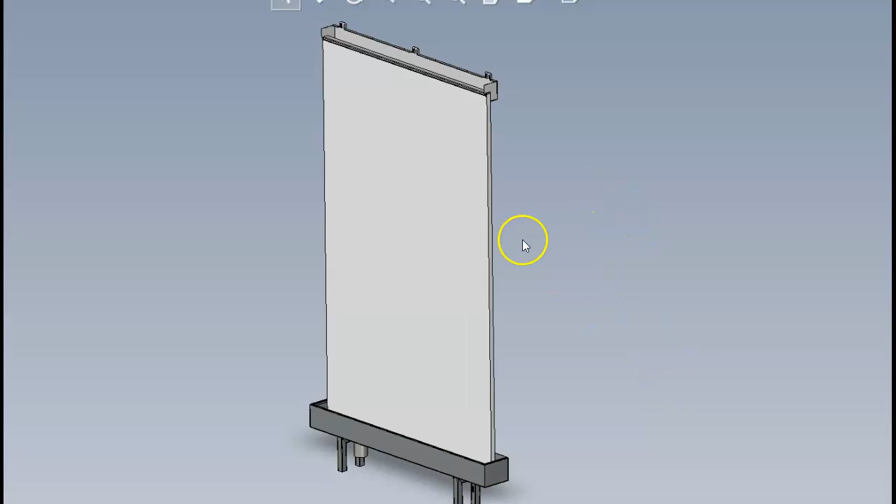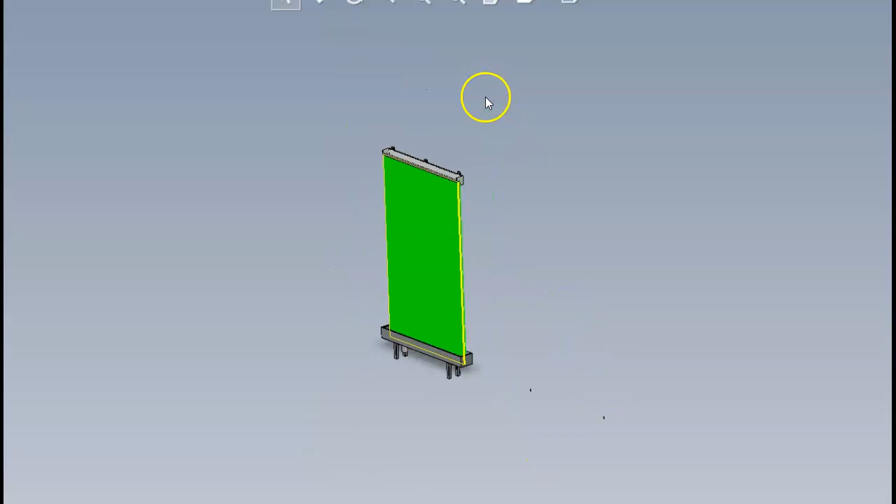But in this tutorial, I'm going to show you the basic setup of a stone water wall water feature. Actually, it's three main components you have to consider. First, it's the overflow channel here at the top, then the bottom tank, and then you have the stone plate. Usually, the stone plates are delivered with, let me check, 30 millimeters. This is what you will usually get when you order a stone plate. And then here I will show you the overflow channel.

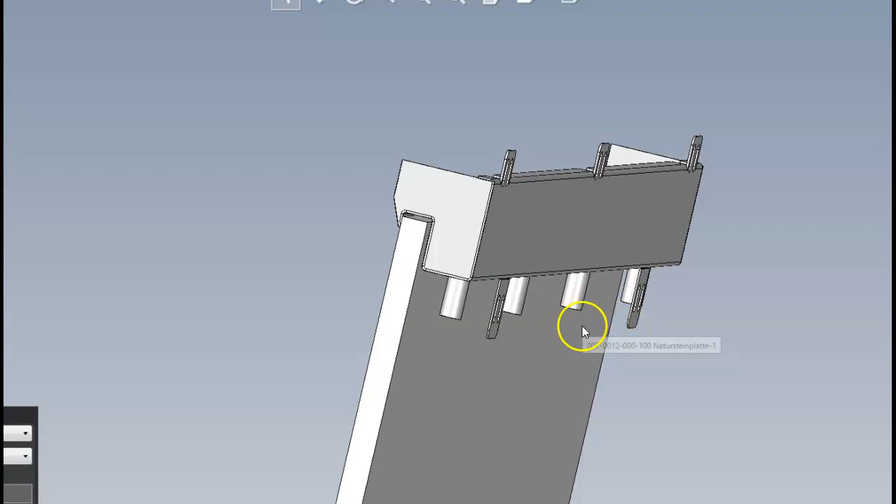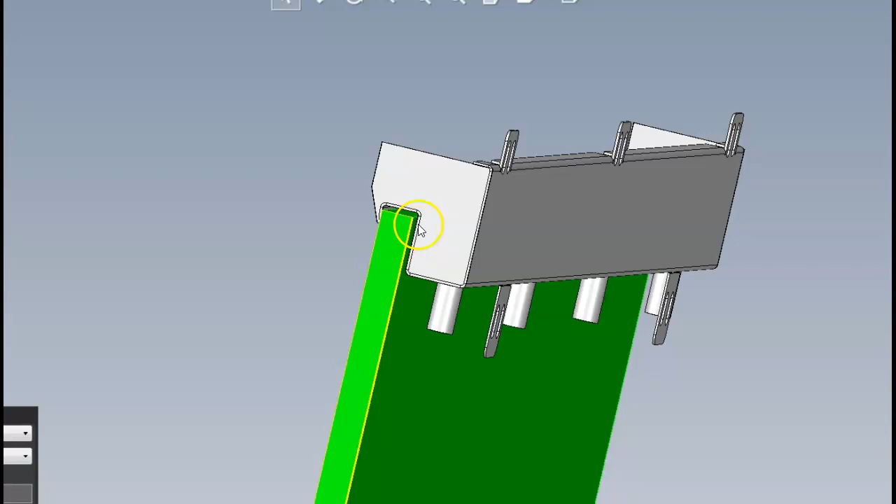So what we have here is the overflow channel. This is around about 6 centimeters in depth and 6 centimeters here in height. Then we have here a profile which is around about 35 millimeters, so that we could put in the 30 millimeter stone plate and we would still have 5 millimeter space in case of uneven bendings or whatever.

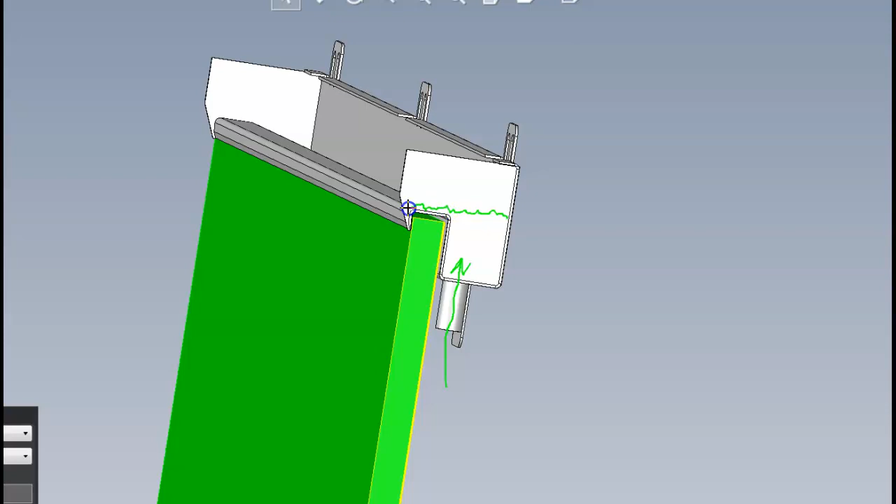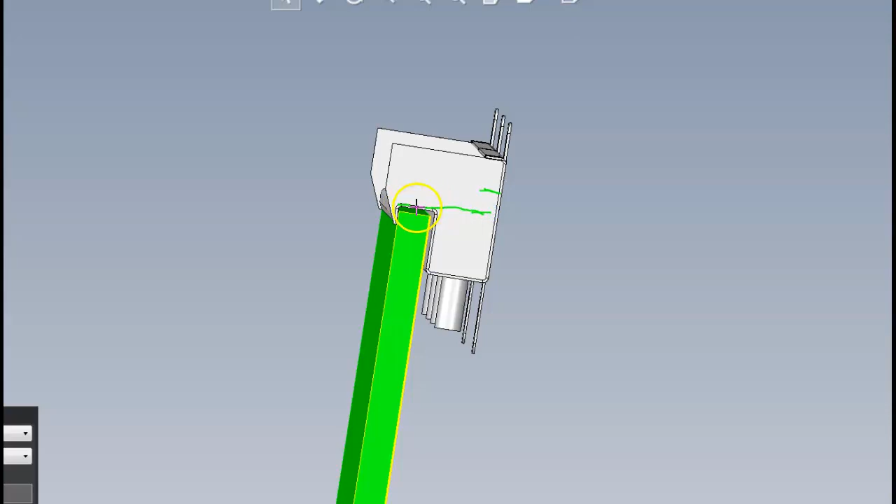So then I think you can imagine that the water will be pumped in here from below, then the gutter or spillway is filling itself, and then the water is flowing here across this lip, and then very probably you are going to get a very nice water film on that stone plate. So what you want to consider is that the back should be minimum 2 centimeters higher than the level where the water will overflow, so that you don't have the water going anywhere else.

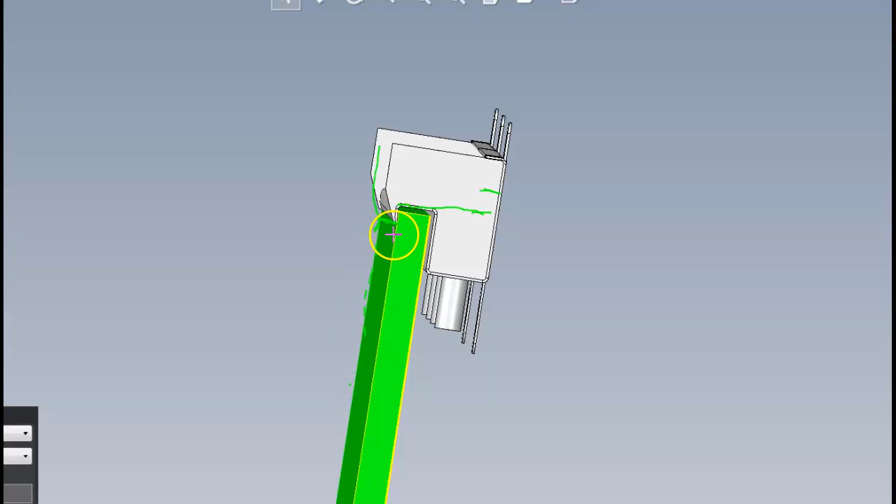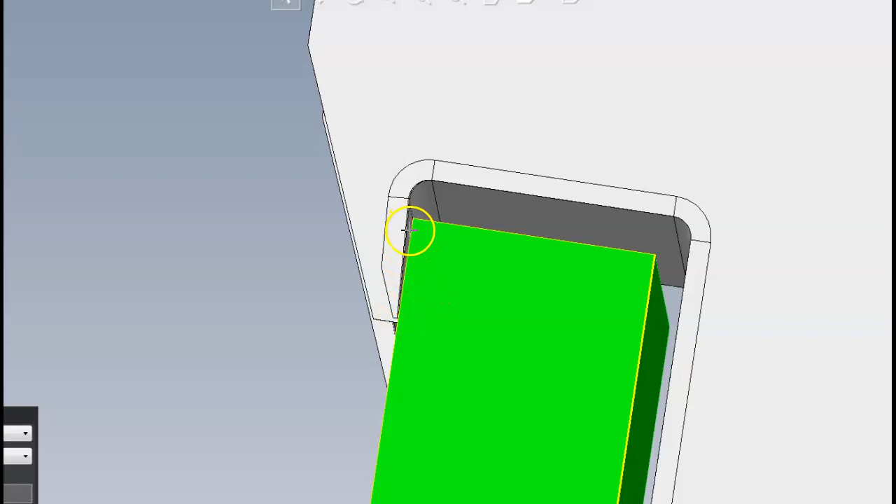Then also what you can see here is we have a sharp edge here, because if you would make the side borders like that, the water could go in front and then drop in a free fall instead of staying attached to the stone plate. What you also can see here is that we have more than 90 degrees in this bending. This is to avoid the capillary effect, as I've already experienced, because if we would have here two parallel surfaces, the water could get up here and then find its way at the back of the stone, and then maybe also at the back of the overflow channel, and then maybe to the wall, etc. So it's very important to take care of that.

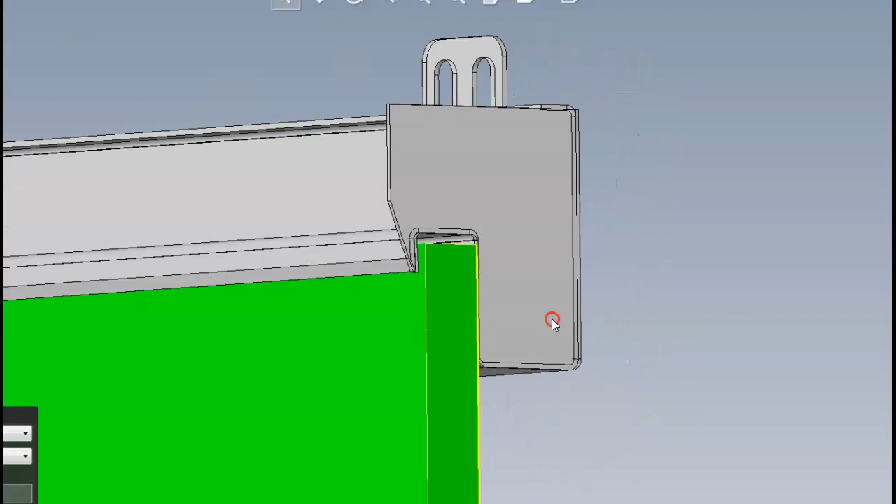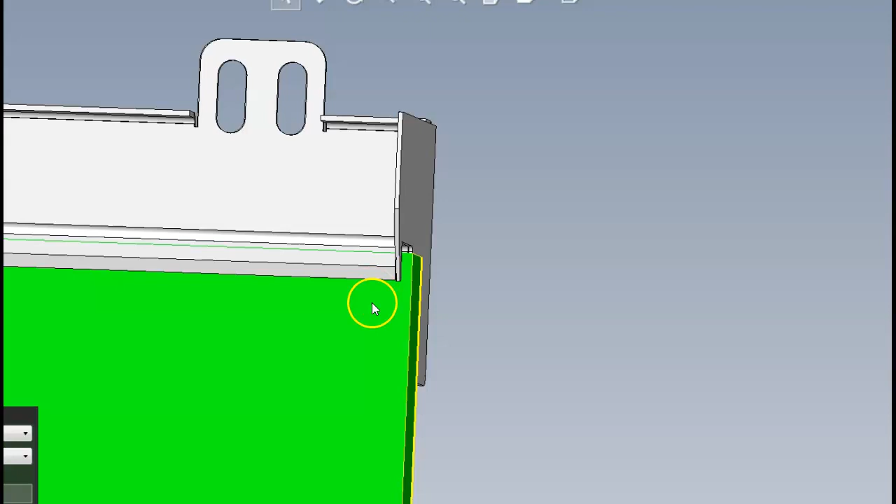So usually we're making the stone plate maybe 3, 4, or 5 millimeters wider than the overflow channel, because the good thing about having a stone plate is that it will suck the water, and the water distribution will go to the full covering of the stone plate with ease, because it's not a glass plate. When you do a glass water wall, it's a little bit more challenging.

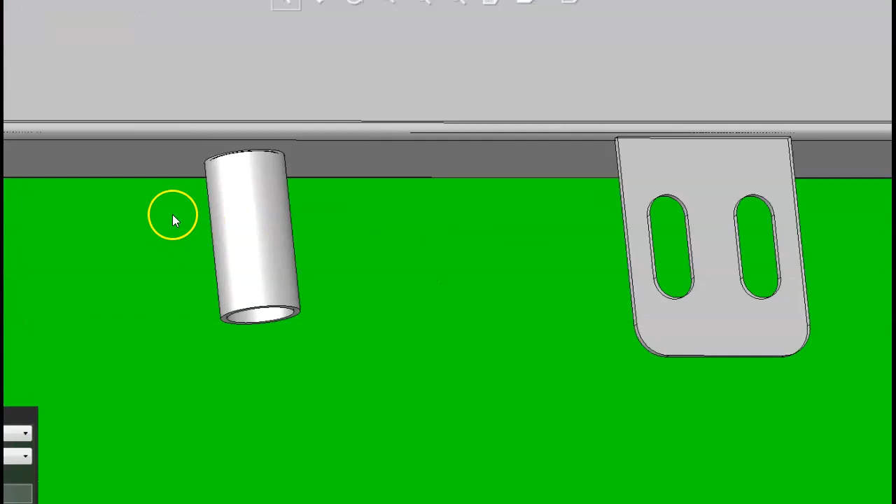And what you can see here is we have 4 points where we put the water in, those have 25 millimeters in diameter. So I think you can imagine how to do that. What we usually do is we take a hose, and then this hose gets a T, and then we distribute the water to those points.

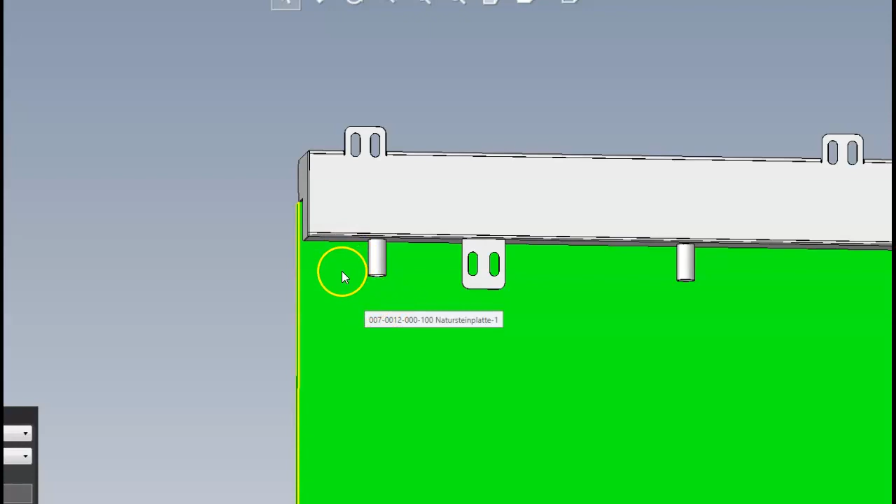And what you also can see here is that we have 10 centimeters distance from this point to the border. And this is pretty important, because at the beginning we thought that we should put this inflow here at the corner, as near to the edge as possible. But actually what then happened was this Venturi effect. So we then had a stream of water which could only go one direction, which is towards the middle, and that actually had the opposite effect.

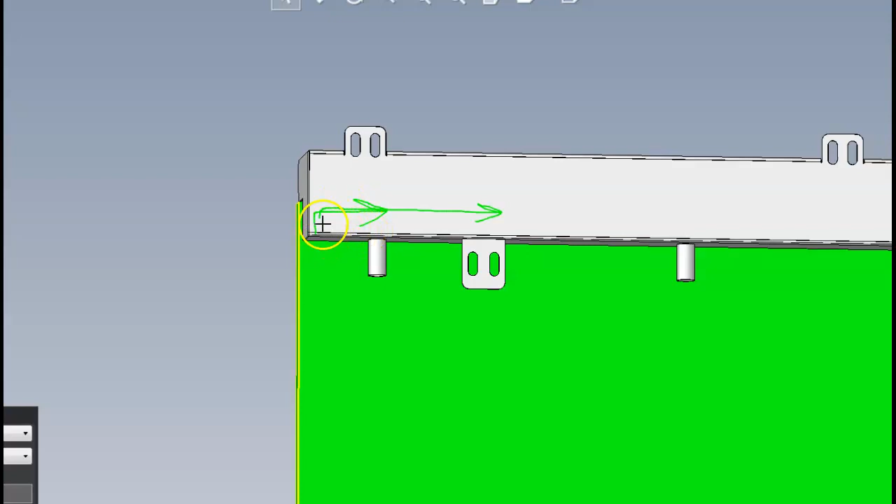Instead of getting water to the edges of the stone plate, we had dry zones here because of this Venturi effect, which means that the water getting here in the overflow channel immediately gets a stream and a flow to the middle of the overflow channel, and then we had no pressure here in the edge.

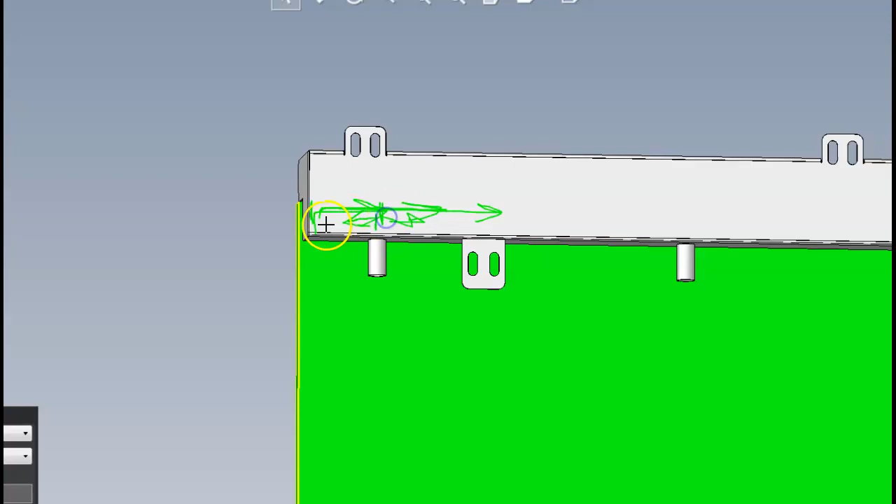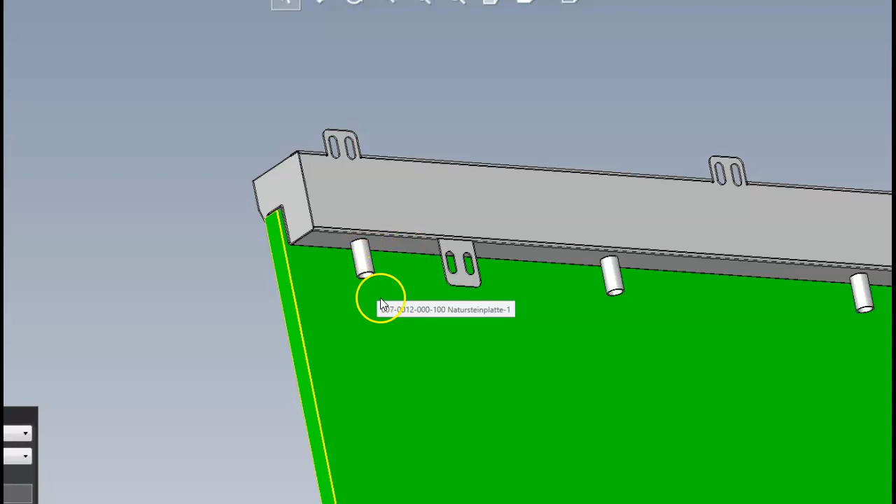If you keep 10 centimeters distance to the corner here, then the water will go left and right, and you will have enough pressure and water moving at the edge of your overflow channel to distribute the water across the whole stone plate. I think this is the biggest challenge when creating a water wall, to get this water distributed evenly.

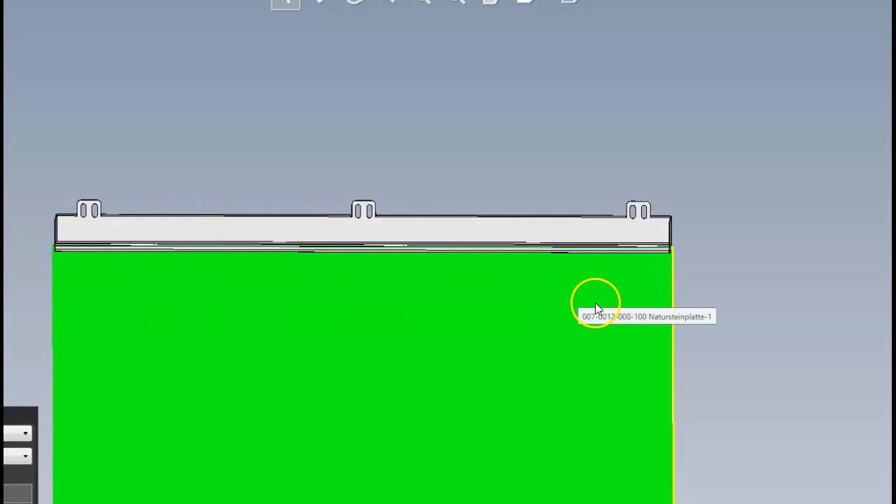So if you stick to those measurements I've just given to you, 25 diameter tube here, then 10 centimeters distance to the edge, 6 centimeters high, 6 centimeters deep, then you're going to have a very nice and harmonic and even water distribution across your water wall, across your stone plate. So this is it for the overflow channel.

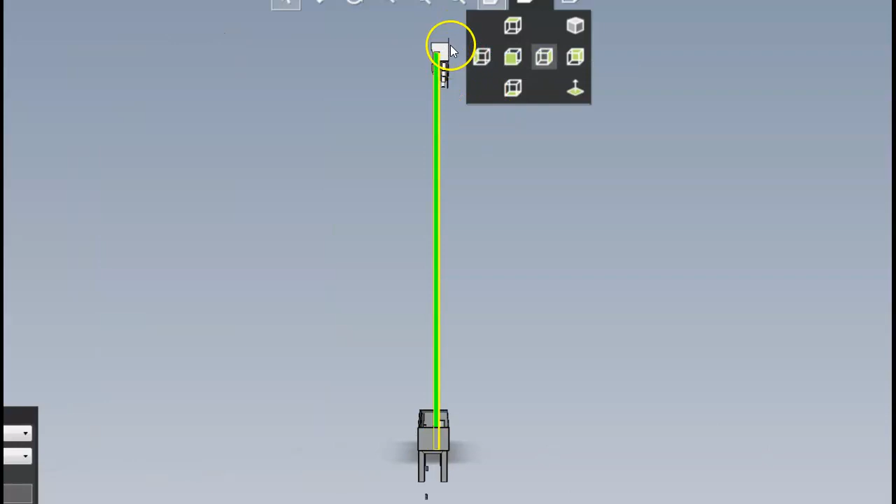Then actually we do it like that. We just screw this overflow channel to the back wall, and you know, the stone plate is stable itself, so you don't need any further things to do because it's stable. So then you just put it here in the bottom tank.

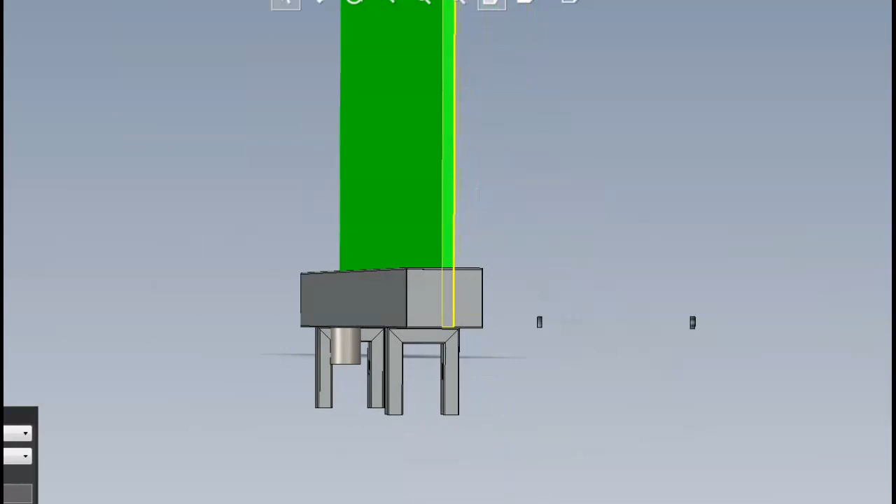In this example, this bottom tank is a little bit higher because we have connected it with a technical tank in the room behind. In the room behind we have the pump, which would deliver the water to the overflow channel as I have shown you, and then the water would be collected here, and through a 70 diameter backflow tube or pipe it will come back to the technical tank in the room behind.

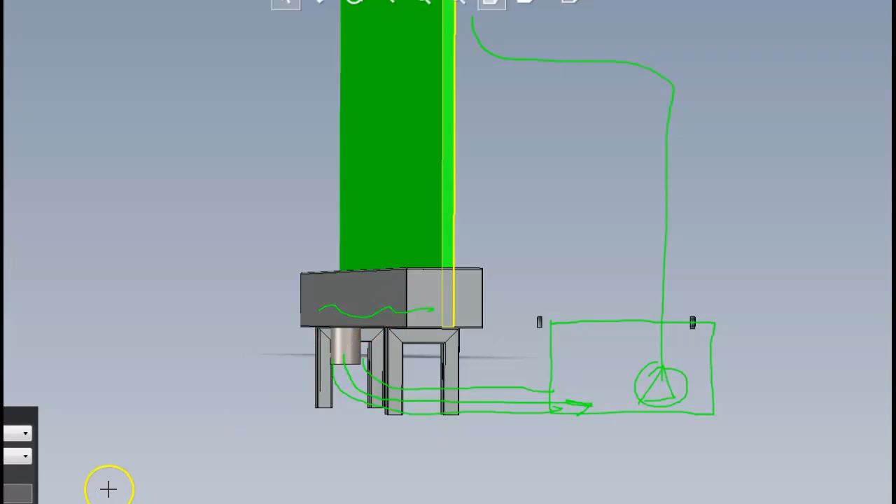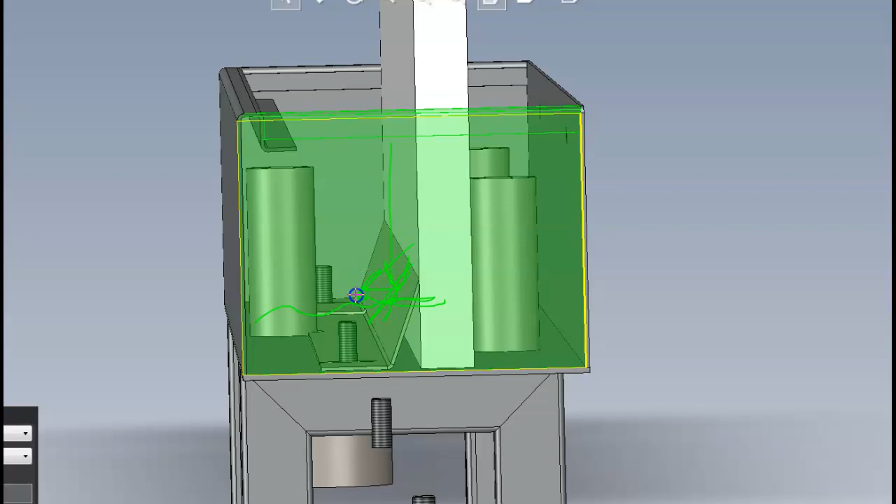But I just wanted to show you one important thing here inside the bottom tank, which is this plate here. It has the function to redirect the water in a slight angle, so that we avoid splashing and we avoid noise. So if you put an angled plate here, the water will not drop straight on the water surface but in an angle, and this will reduce sound and also splashing a lot.

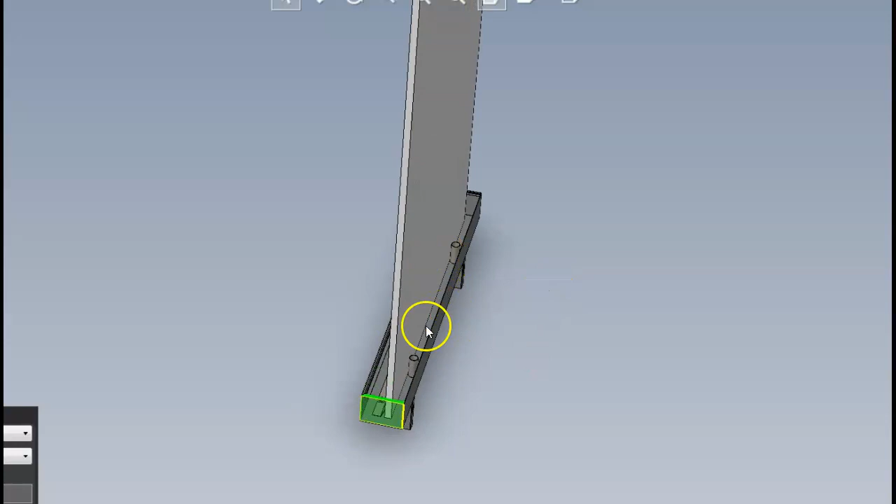And what you also can see here is that we have used those standing pipes or tubes to get in from the wall behind the stone plate, and then we would put the hoses through those tubes and then do the T and go to the sub distribution. So yeah, this is the basic setup when you do a water wall feature with a stone plate.

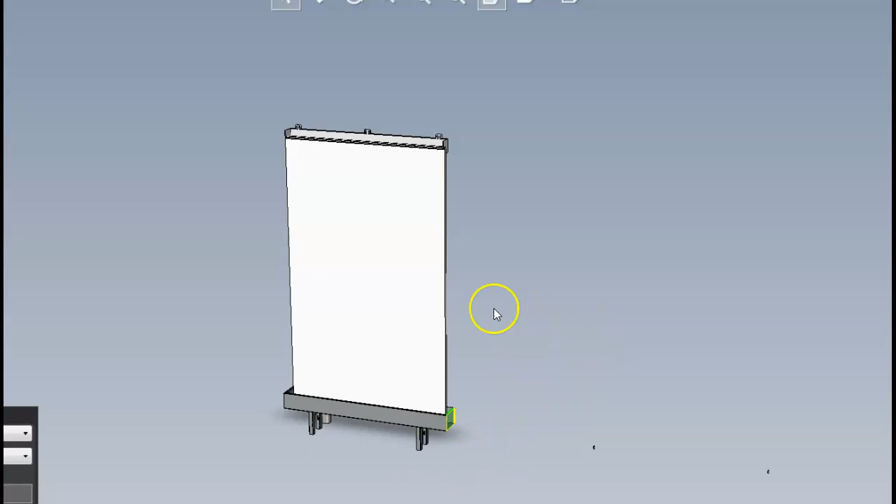And what I would recommend is that you use a dark stone, because what we already did, and what's a really sad story, is that if you use a white stone or a pretty light stone, then you won't see the water almost at all. You can barely see the water, and the reason for this is that water itself is transparent. So the only thing you see on water is the light reflections.

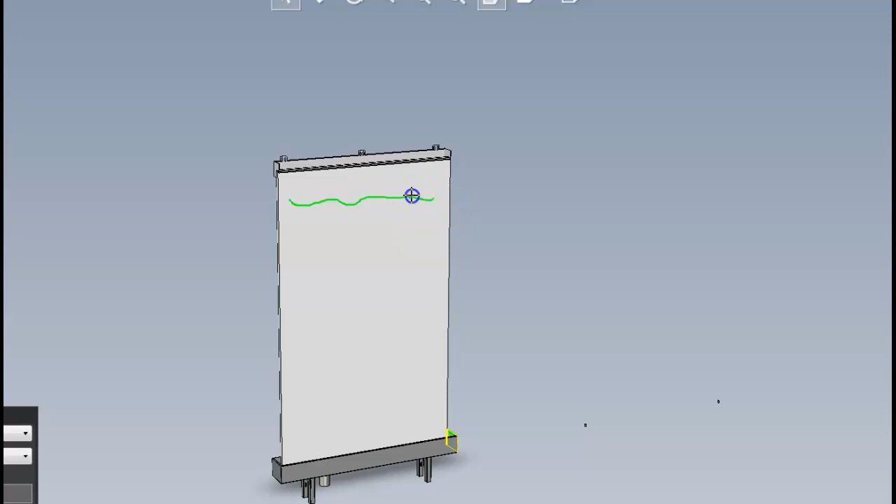So imagine if you have a dark background, are you going to see the light reflections better? Yeah. But if you have a shiny light background, then you barely can see the light reflections. So actually you could really turn off the water; it will be almost the same effect if you use a white stone. So use darker stones, because otherwise you're not going to see the effect of the water waves unless you use really very, very strong lights.